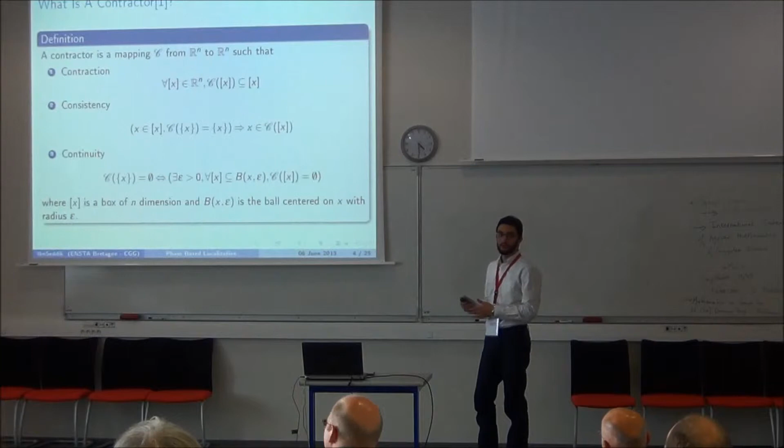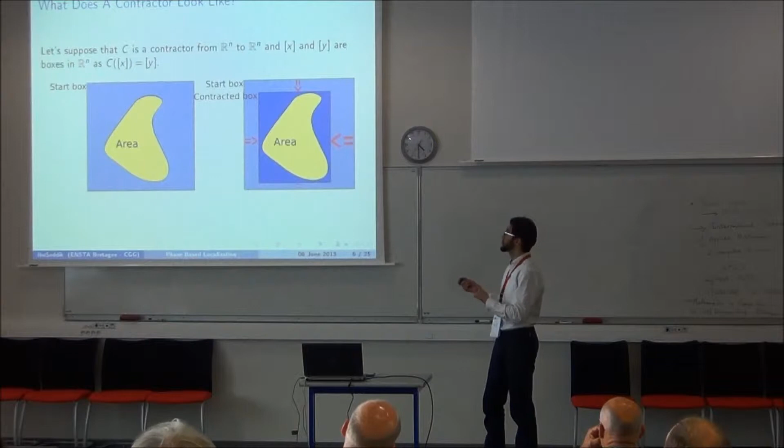But this is like some kind of optimal contraction that we can go just around. But most of the time, it's not what we have. What we have is something like a box somewhere like this, and then we try to contract it. And if we contract it well enough, we can get a smaller box in this way. So this is an outside contraction.

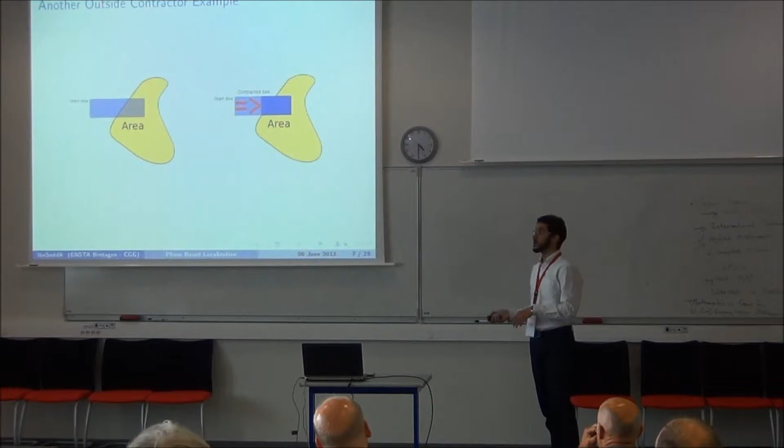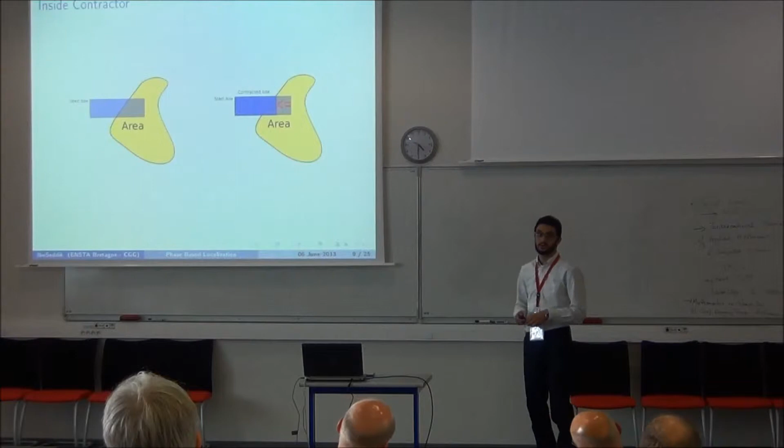So then I'll explain the phase equations and the problem and our motivations. So let's suppose that we have a source somewhere at coordinates bx and by, emitting a continuous sine with a known frequency. And we have a receiver at the point px and py which is recording this signal.

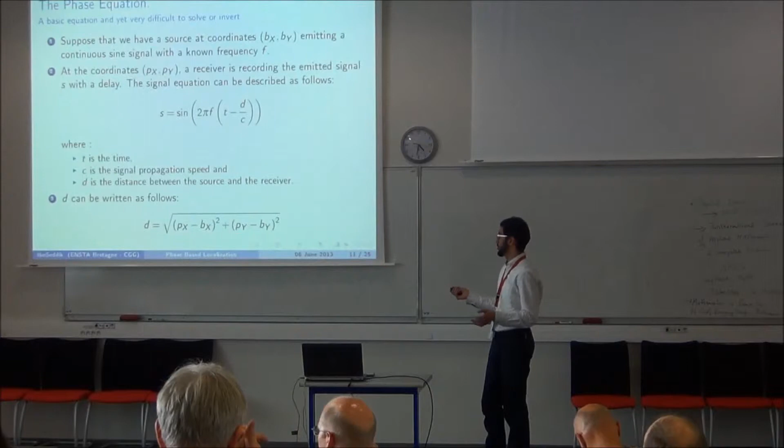So we can write the signal as follows: S is a sine of 2 pi f times t minus d over c, where t is the time, c is the celerity of the sound and of the signal, and d is the distance between the two points, written as the normal distance between two points. So then the signal equation is written in that form.

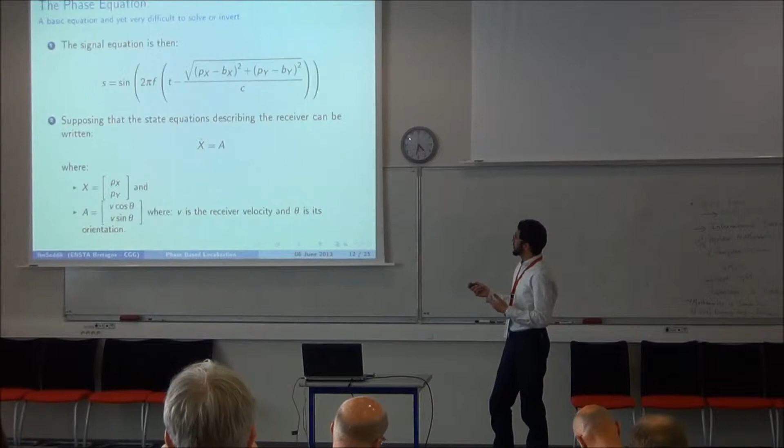And then let's suppose that the receiver has state equations and is moving in the space with the following state equation, where x is px and py, with the velocity times the cosine of the orientation, and the velocity times the sine of the orientation of the target. So here, this is the problem. Those are the equations, and we're trying to find px and py. We can measure here the velocity, the orientation, and the signal.

So our motivation here is to use interval analysis instead of Monte Carlo methods or other methods, to try to find a solution and be sure where the receiver is not, and where the receiver may be or is in this area, which is something that is not really possible with most probabilistic methods.

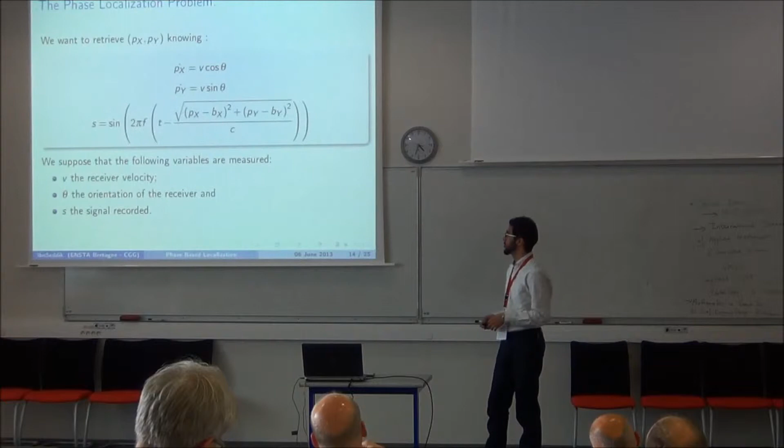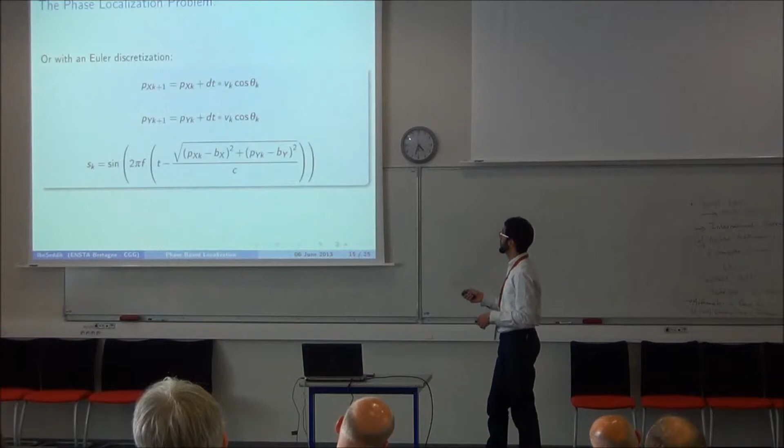So here in this example, I will use the Euler discretization, like shown here, and then the idea is to use a SIVIA-like algorithm. We will have a big box at the start. We suppose that the receiver is in it. We put this box in a stack.

Then we pick a box from the stack. We contract this box. If the contraction gives us a box smaller than the precision we're looking for, which is the width of the box, let's say, we will keep this box and we will not put it back in the stack.

If not, we have to bisect it, split it, let's say just split it in two boxes, and put it back on the stack, and we'll run this algorithm until the stack is empty. So then, as the implementation, let's take again the same example.

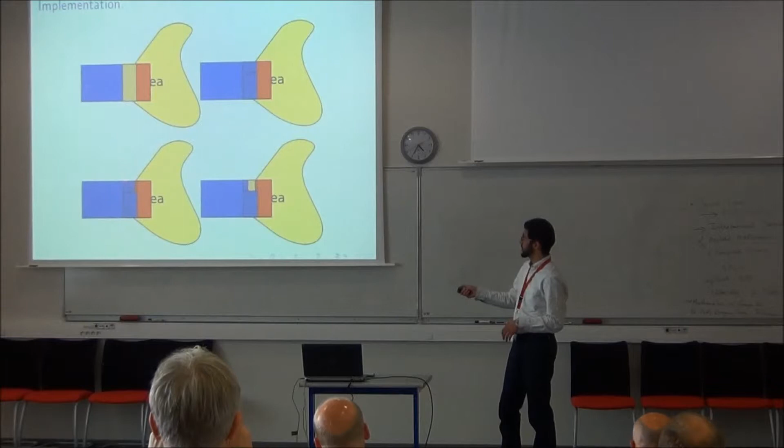And then we check the width. If the width is less than precision, it's okay. If it's not, we're gonna contract it again. And this is what we do here again. So this is the resulting box. Again, we split it in two. Take this one, outside contractor, we have the blue box. Inside contractor we have the red box. Outside we have the yellow, and move over.

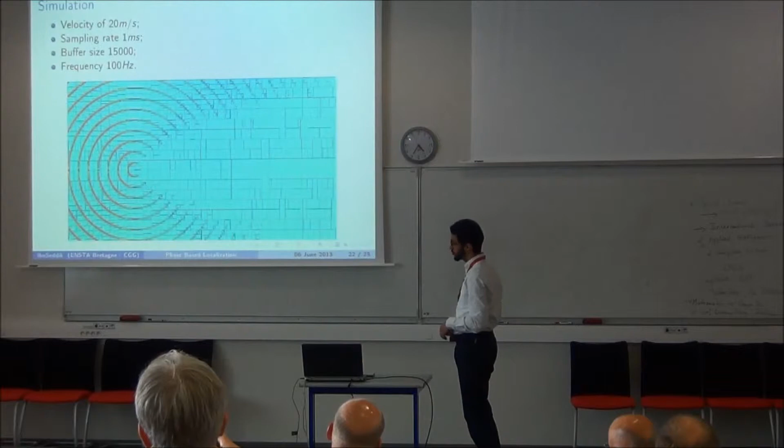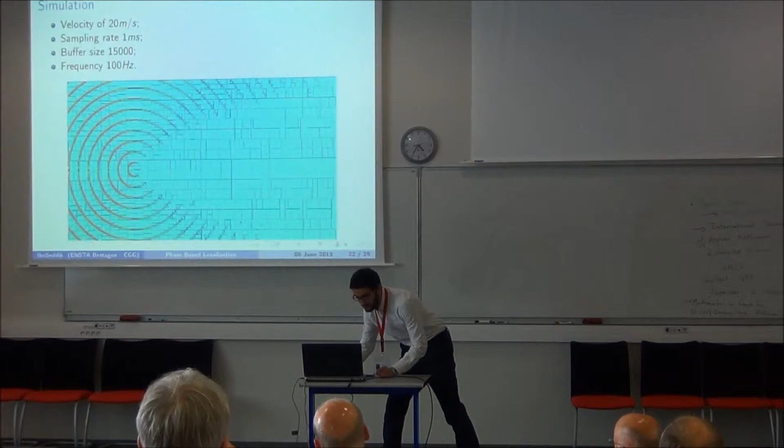So for this example, I suppose that we have a source of the signal over here, and the robot is right here. It's just a dot now, and then we have the tail. So in the simulation, as you can see, from the start, I started contracting all over this box, and in each iteration, because there's the time movement, because it's time lapse in here, I have all these boxes, and each time I work on all of these.

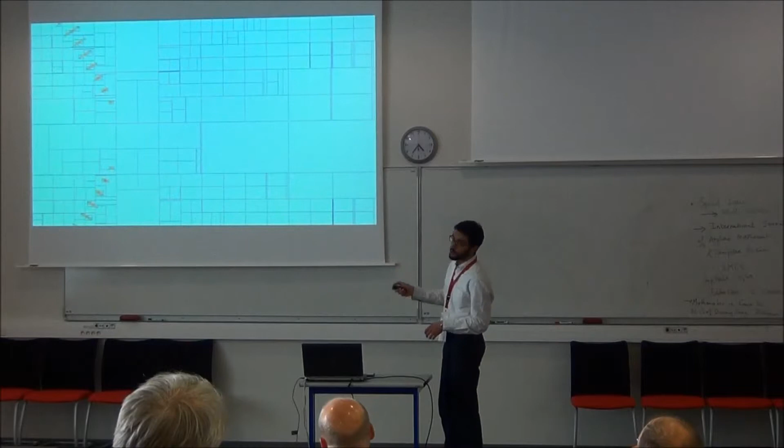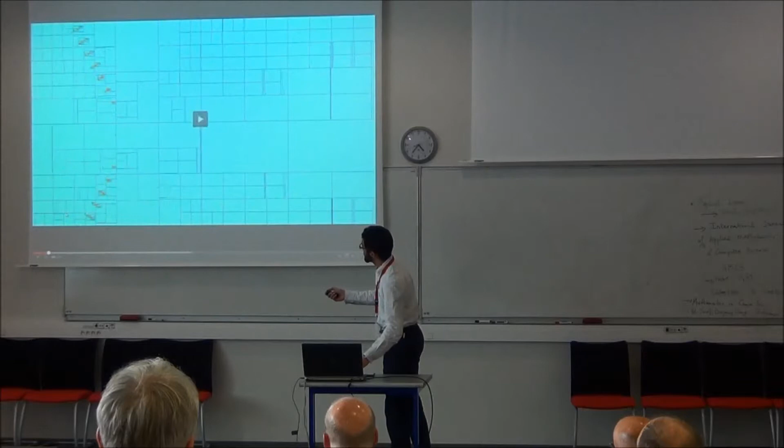So every single blue box, I'm 100% sure that there's no solution inside. The red boxes are a solution of the signal that I have recorded, which has a lot of noise. And the yellow box is where I'm not sure the solution is. And as you can see here, those are some dots over there, and those are the buffer. Because what I do in this example, I take the signal and I keep the value that I have recorded.

So first, I remember that I have recorded all the signals. So what I do is I have a forward-backward contraction. So I take all this box in the beginning. I make a forward contraction to apply every movement I did. Then I apply contraction on the signal I have and the signal received. And then I make backward contraction to get back to the possible solutions. So this is what I get.

And here I have, this is why you see the buffer here. And the effect is more like a snake after that. Because here, and here again, I have a mirror. Because as the source is in here, I can be either doing this or doing this part, which have exactly the same signal. So we'll keep moving on.

And then, here for example, I make a turn. But when I make a turn, I directly eliminate this possible target because I make this turn, and if I was in here, the equations are not verified anymore, because of the buffer actually. So again, I'll keep on moving.

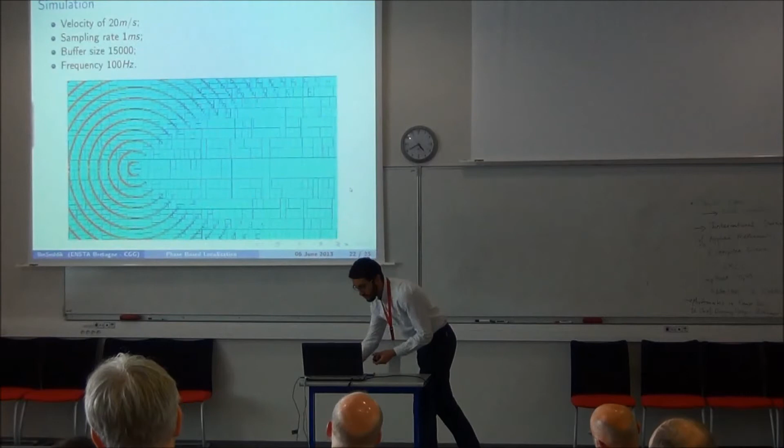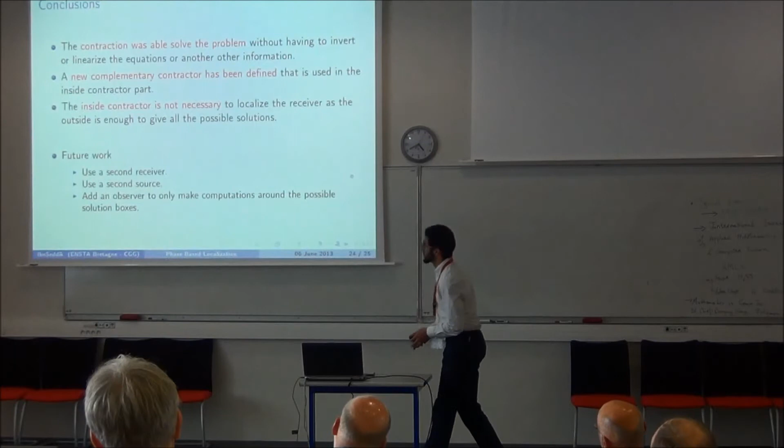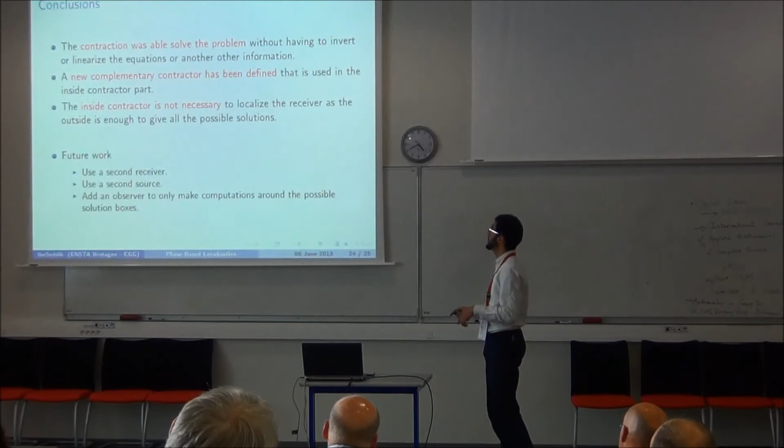Okay. So as a conclusion, as I have shown, only using contractions, we have been able to eliminate and to solve this problem. What we did also is implement a new contractor called the complementary contractor, as it always eliminates what's inside the solution. And we know that the inside contractor is not necessary, as all we want to know is where the possible solutions are. So to speed it up, we can use only one outside contractor, and we will always get all the possible solutions, even if the contraction is not really in.

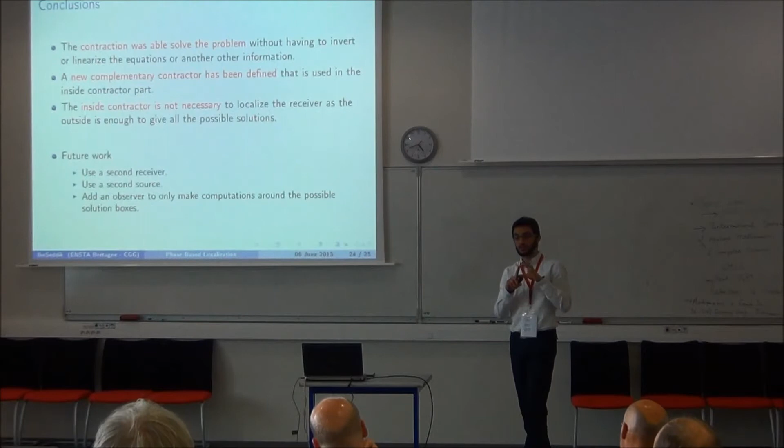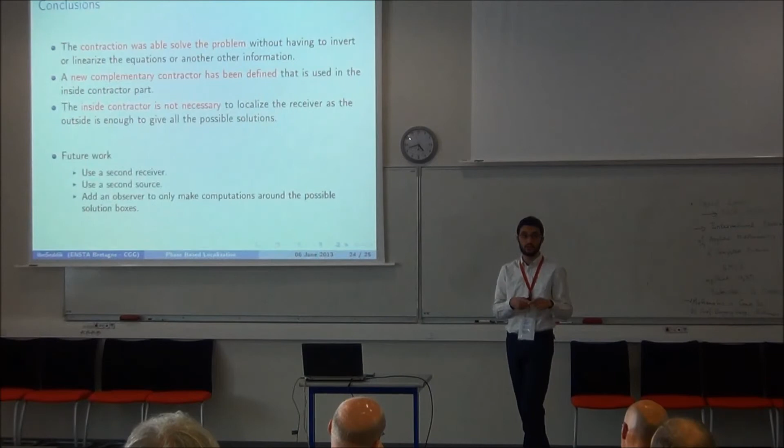So for future work, we are thinking of using a second receiver to be even more precise, as we saw in the cases where we are not moving that fast. A second source, maybe, to see what we can get from it, and maybe also add an observer. As we saw in the first experience, at some time we have only one box, so instead of contracting all the boxes, we can always contract on the surrounding box, and then the other solutions will not appear because the box is smaller and they will be outside the box, and the contraction will not contract them.

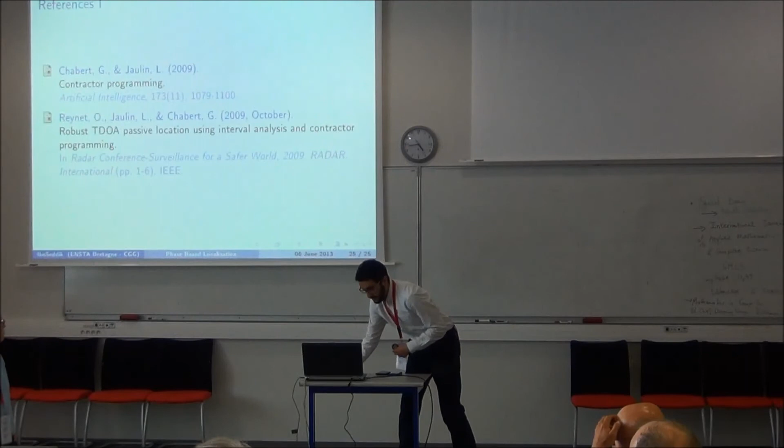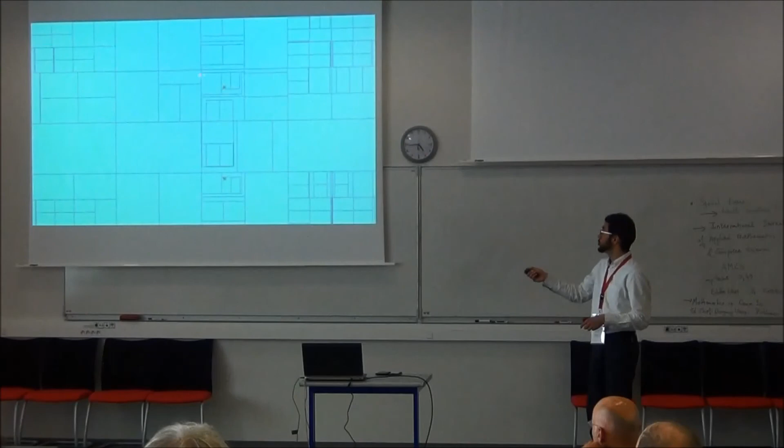Any questions from the audience? Yes. I'm not sure I have understood why you have those ambiguities in the measurements, why you have two symmetric solution points at a given time. Because here, what happens is I am recording a signal, and I know that my orientation is this way, and I have a speed. So from the start, I know that I can be going somewhere in parallel all over the space. When I record the signal, I eliminate every other possible solution but those two, because they observe the signal the same way.

Unless I continue moving, and at the end, around here, when I change my orientation, I can eliminate the other part, because this signal here will not see the phase the same way as this one. So I don't have the other solution. Okay.

Okay, maybe one final question from my side. The observer that you mentioned, would it track some kind of region of interest around the possible position of the robot? Well, what I'm planning is, for example in this picture, instead of contracting again all over this space, I know that I can only be here, because this is what has been computed till now. So in the next steps, I will always be contracting just around here and not taking into account all the space. That means tracking some kind of region of interest, like in image processing? Exactly. Yes.